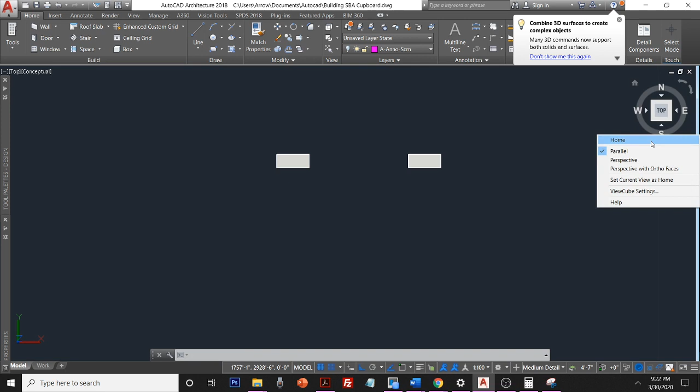Alright students, for the purpose of your plan sheet, this is the orthographic drawing introduction. You will see that this is the object that you made in class. All three classes will work with this project, even though each person's cupboard is slightly different to match the area in which it's going to be placed. You all are working with the same basic design.

So for the purpose of the plan sheet, we will all do the same orthographic drawing, the same perspective drawing, and the same material list and such. So therefore, this is the video to explain to you how the orthographic drawing will be made.

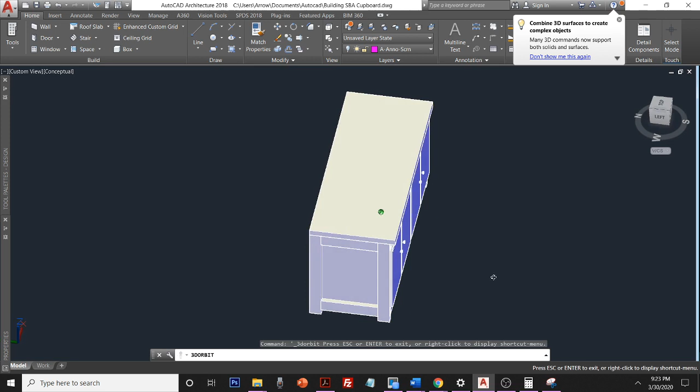As you can see, this is our cupboard, and as we isolate the cupboard and rotate around it, you can see all the parts that make it up. For example, let's strip it back down to when it was just a frame, and this is what you started out with originally. Then we added panels to the side,

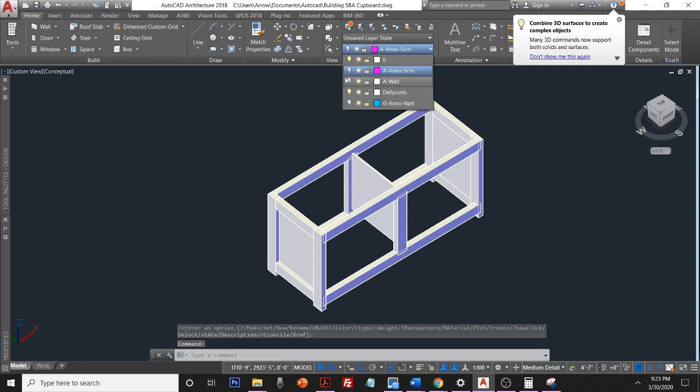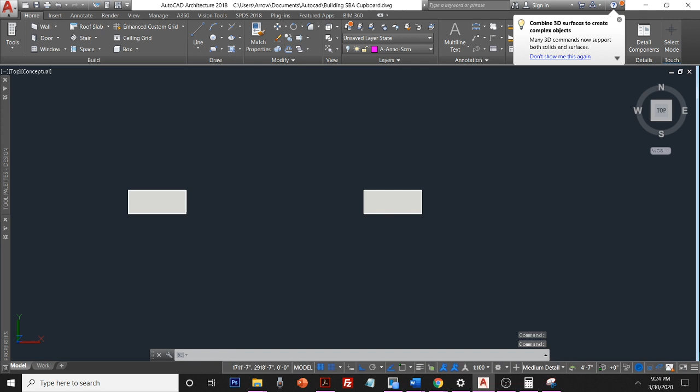and the back and base and top, along with the doors and knobs and hinges. So what do the different views look like? Start by drawing the top of the cupboard. The top would simply just be a line, or a box I should say, that shows the width of the cupboard.

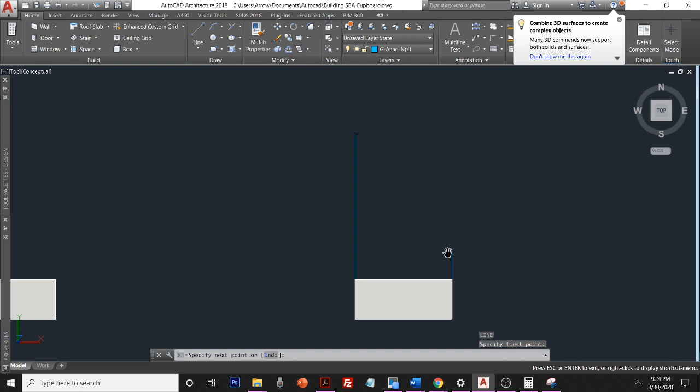Projection line, vertical. Also projection line, vertical. Horizontal line, and let's take this, make a copy.

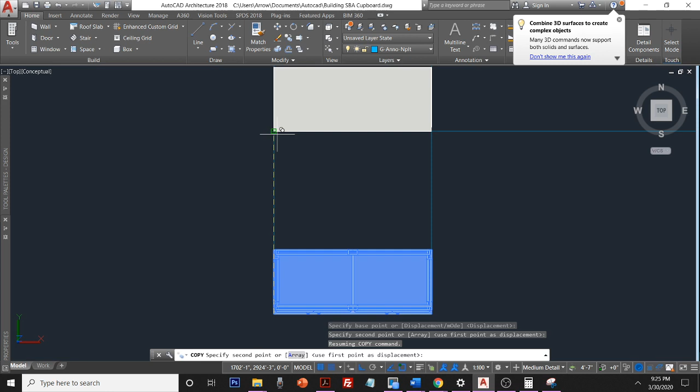So here we have our plan view, which is from top looking down, and here we have our front view. Now if this is to actually look like a front view, you're going to have to switch the angle at which it is showing.

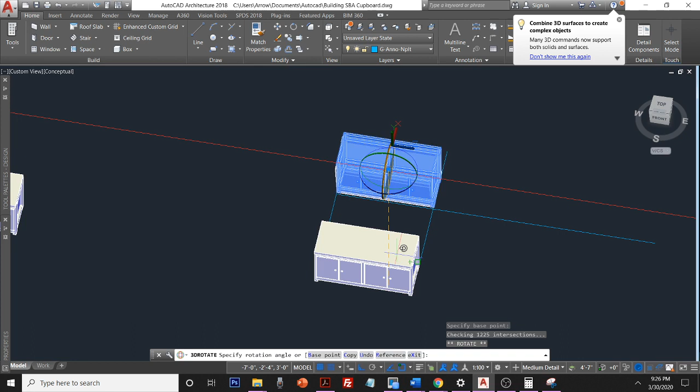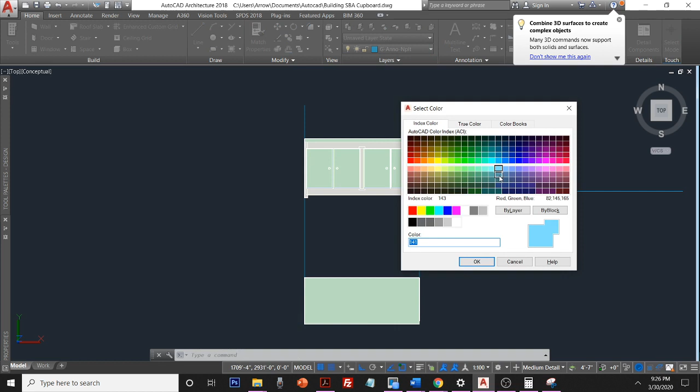Like so. Now you can see that the cupboard is no longer from above, but you can see the doors and such. Let's straighten up some of the colors a little bit. Good. Now let us switch to side view. Let's make a view of the side.

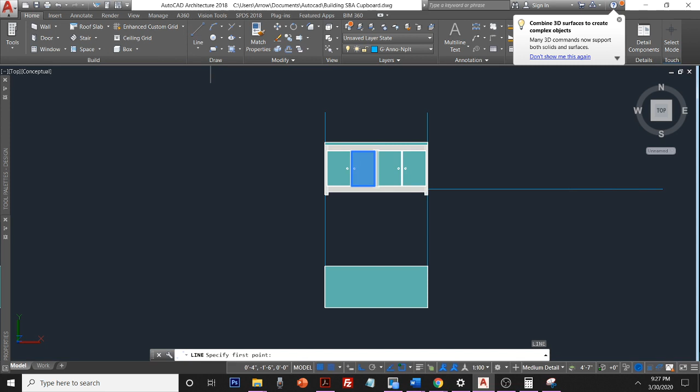Let's take this. Well, not yet. First 45-degree line, and so you're going to draw a 45-degree line from the very tip. There we go, 45 degrees. And from that 45 degrees, we need more projection lines. Projection lines should start from the plan view.

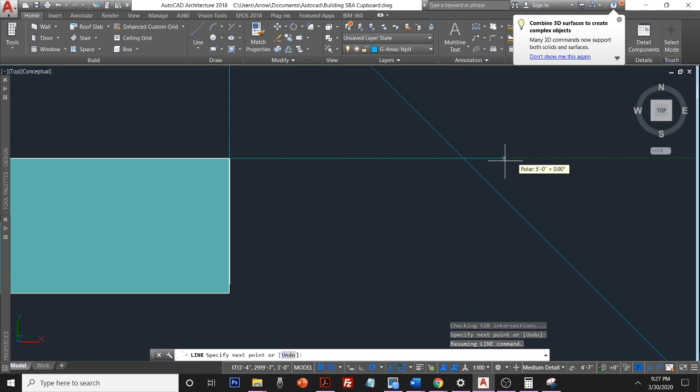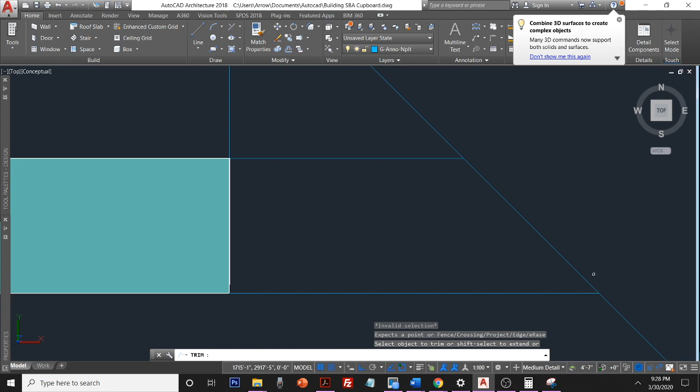Projection lines would start at the top, go across, and projection lines will also start at the base and go across. Once those projection lines meet the 45-degree line, they stop there and change direction. They change direction and now start to travel vertically, like so. Another line from the other projection line will go vertically, like so.

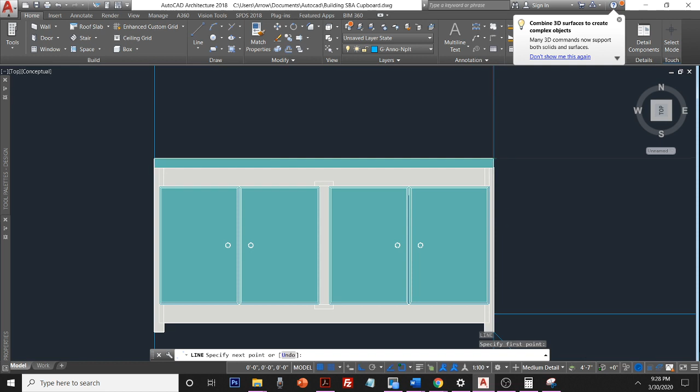And also projection lines would start from the top of the cupboard on the front view and go across, like so. Let's trim or erase all the lines that we no longer need.

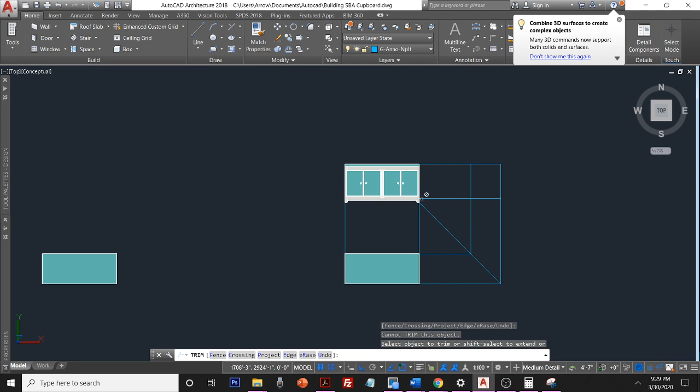So based on what we can see, this is our plan from above looking down, also known as the top view. This is our front view, and what we're trying to put in this piece over here is the side view. So step 1, top view. Step 2, make projection lines horizontally. Then step 3, 45-degree line. Step 4, vertical projection lines, and they will intersect with the horizontal projection lines to make this area, and that's where the side view of the cupboard will go.

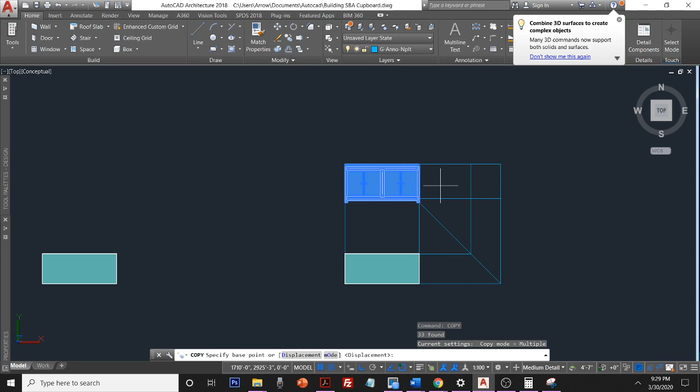Let's see if that works in this case. Let's make a copy of the cupboard. Let's grab it here, place it there, but we need to now turn it to the side. So let's do that.

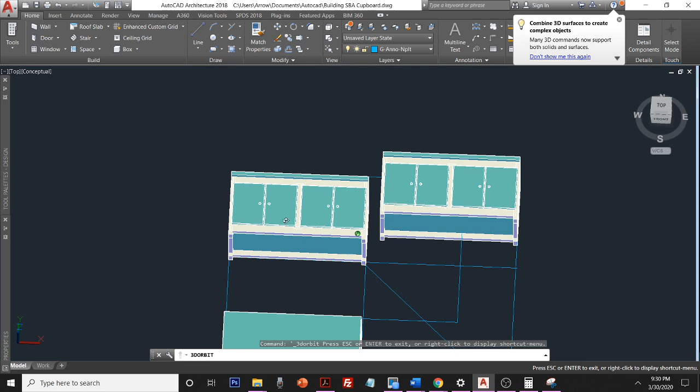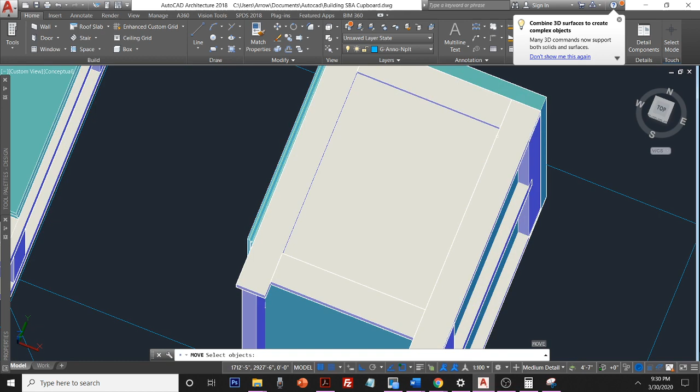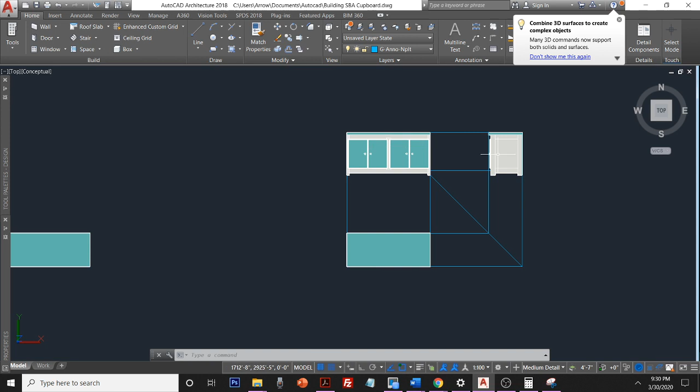Good. And let us move it back into the place where it should be. Let's put it right back in that corner. Good. So if we go back to top view, now we can see that the cupboard is in all 3 views. From top leads to front, and then from the front view you project lines to show the side view. Let us turn off our projection lines, and that's basically what we have there.

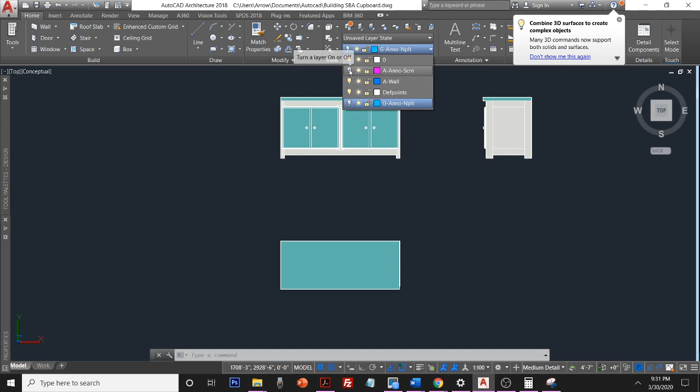You must label this, meaning the title should be underneath here that says front, a title underneath here that says plan, and a title underneath here that says the right elevation, or if you did the left side, then you would say left elevation. And the projection lines, these blue lines here, would show lightly because they're construction lines, they're not supposed to be dark.

Now, if you are a technical drawing student, you can use your AutoCAD. If you are not a technical drawing student, you can use your ruler and pencil and do this as a sketch. No freehand sketch, rule sketch, meaning straight lines with a ruler using proportion. If you're not an artist and you're not too accurate, your lines should be somewhat straight.

Or you can use any software of your choice, as long as you can get this and take a picture of it as a soft copy and add it to the plan sheet, or you can do it in AutoCAD and save it as a picture and send it to the plan sheet. So your options are digital, soft copy, or hard copy, either way, as long as it gets to the plan sheet. Remember that for the plan sheet, there's a copy of it on the Google Classroom where you can find the template and a sample that you can follow.